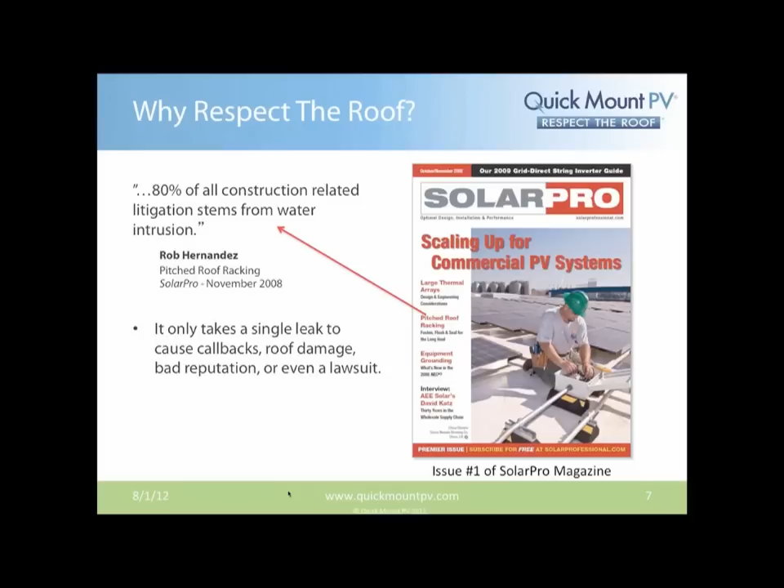For those that haven't experienced a leak in your home, I have experienced two, and one of them was flashing related, not solar flashing, but just flashing. It's really surprising how rapidly the cost to repair these adds up. Drywall damage on ceilings in particular can be problematic if it leaks in the kitchen, and you have to repaint expansive areas of ceiling to match the color. So it's not an insignificant issue, and the cost really racks up quickly.

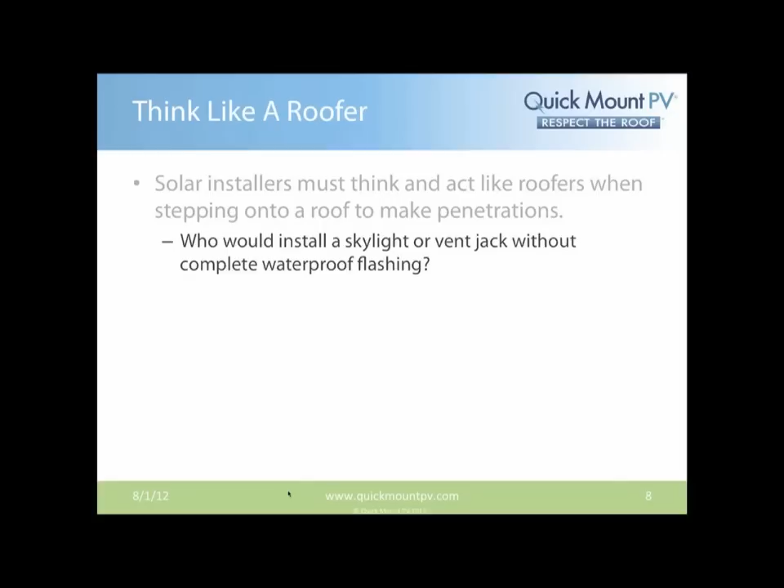So solar installers must think and act like roofers when stepping onto a roof to make any penetrations. Who would install a skylight or vent jack without complete waterproof flashing? And yet today we still see, I wouldn't say most, but a substantial number of installations being installed with absolutely no flashing to waterproof that penetration. So obviously the question is, how would a roofer approach mounting PV or solar thermal to a customer's roof? And in the end, how can we maintain that roof warranty from the roofer?

We'll talk a little bit about what code is for solar mounting systems. This is an image that actually appeared on a major solar publication a couple years back, and it's really surprising to see something like this show up, in large part because there are several fundamental errors with this installation. Number one, and first and foremost, OSHA does require now that everybody who works up 6 feet above the ground, in most cases, would require some form of fall protection, whether it be a fall protection gate or some type of self-arrest fall harness. Failure to use fall protection is a violation of OSHA that they have been actively targeting in the eastern part of the United States. So that's the first problem you see with this.

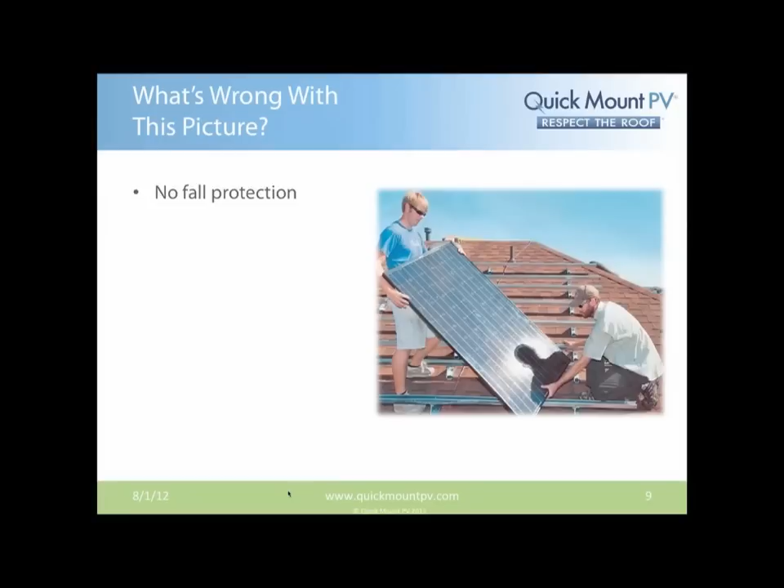Incidentally, the exemption for residential roofers on wearing fall protection for OSHA regulations did expire last year, and now OSHA is again actively pursuing that.

The other interesting problem with this installation, if you look at the mounts, is a special type of bracket with two lag bolts that attach directly to the roof, and the bolts on all the mounts are going right up the same truss. That's a less desirable way to install. Ideally, you'd stagger those mounts every other truss so you don't have to drill as many holes in a single truss. From a structural standpoint, that would be highly desirable.

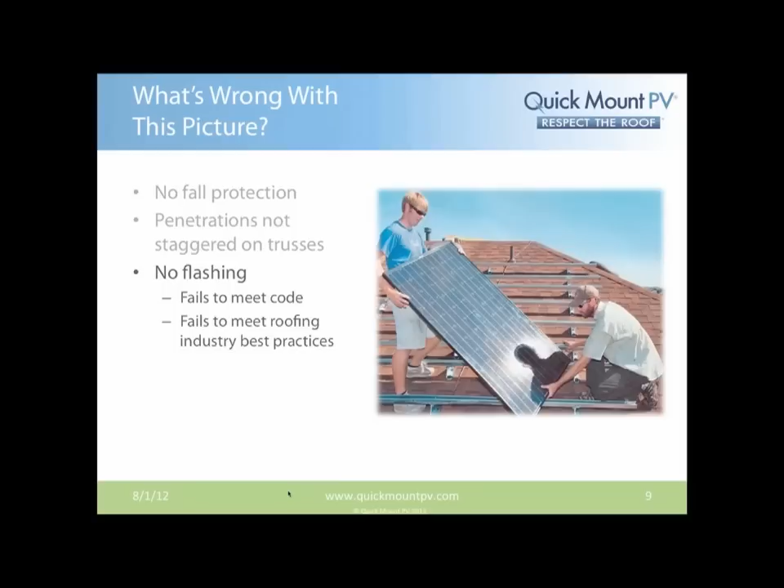Equally concerning is the fact that the feet that are installed have no flashing, no way to effectively waterproof the system other than some sealant in the hole. This not only fails to meet code and best practice, but is a vulnerable liability for your business and also voids your roof warranty. When you do not use flashing, essentially the roof itself is compromised and the roofer will no longer take responsibility for leaks that crop up.

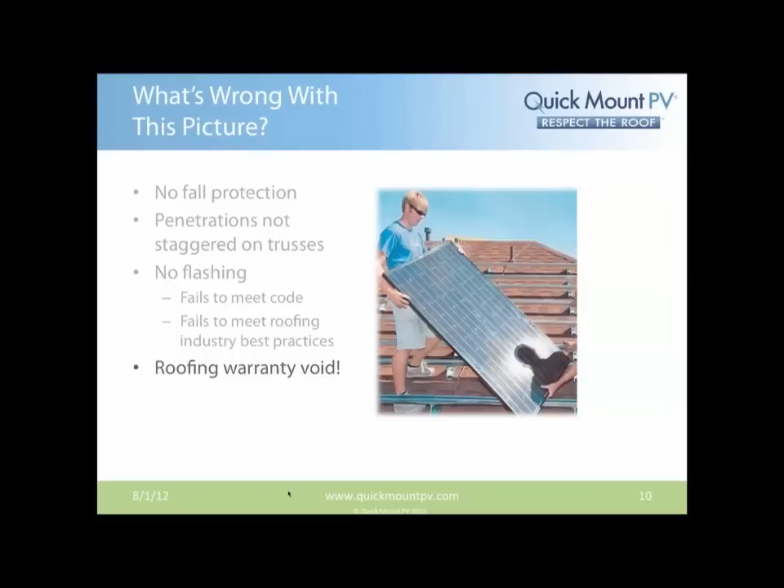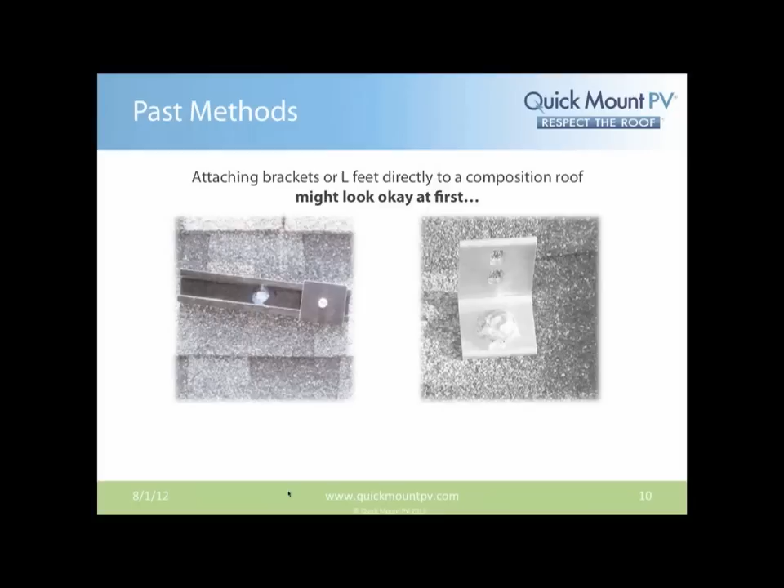In the past, attaching an L bracket or some type of L foot directly to a composition roof might look okay at first, and this is often what we had seen until about 4 or 5 years ago. This was the norm on composition shingle roofs, where you might have on the left-hand side a product known as a tile track, just bolted in the center of the track to the roof with sealant liberally squirted around the head of the bolt, or the L foot on the right-hand side directly to the roof. But these penetrations were dependent entirely on sealant for waterproofing. We've seen that over time, leaks and corrosion are inevitable.

In this example, our owner, Stuart Wentworth, was actually called out to investigate an installation a few years ago. What he found was a comp shingle roof where the tile track product was installed vertically, but there was no flashing, just sealant around the perimeter. And when we removed it, they had a leak in this house. What we noticed were obvious signs of water intrusion, despite a liberal amount of goop used around the perimeter of the tile track.

So it's just not sealant. With heating and cooling cycles, it breaks down, and that seal eventually lets loose. It may not be a major breach, but it might be a small breach right in the vicinity of where a little bit of water can become dammed or pool up, and it can leak in and cause wood rot and extensive damage. So it's unrealistic to depend on sealant for decades of waterproofing service.

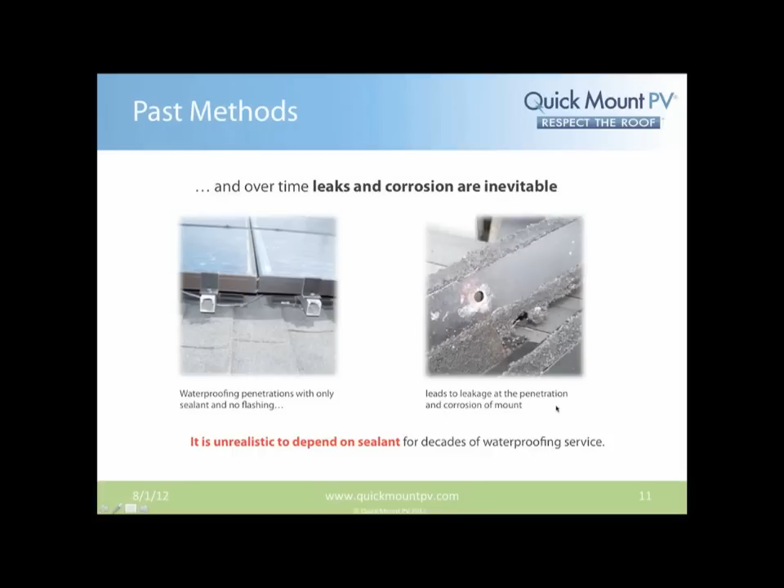Okay, so moving on here. Quick Mount PV products have a full line of flashings for a broad range of steep slope roofs. We're the recognized standard for 100% code compliant watertight mounts that meet or exceed the National Roofing Contractors Association and the Tile Roofing Institute standards and best practices.

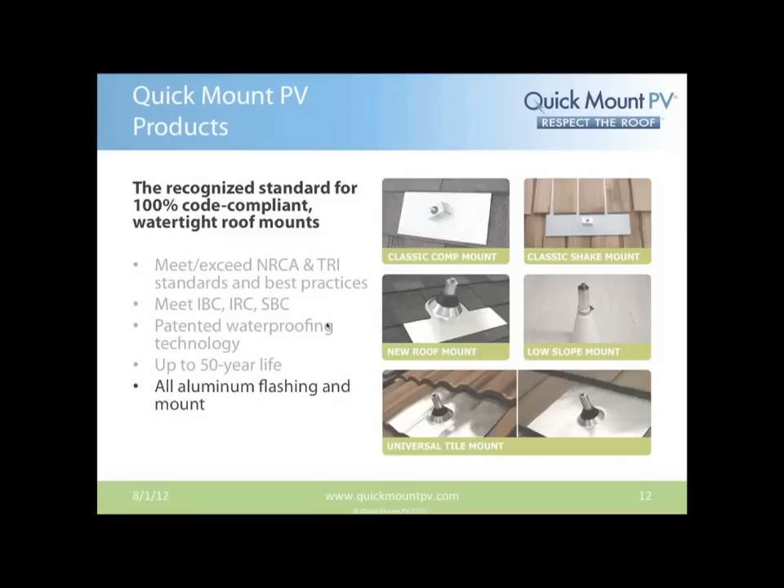Now there's some gray area between what differentiates a standard from best practice from code. But effectively speaking, we've looked at all applicable industry standards, best practices, and codes in designing our products and choosing their features. We meet all applicable building codes like the International Building Code, International Residential Code, and state building codes. We have patented waterproofing technologies, and up to a 50-year life with an all-aluminum flashing and mount and stainless steel hardware.

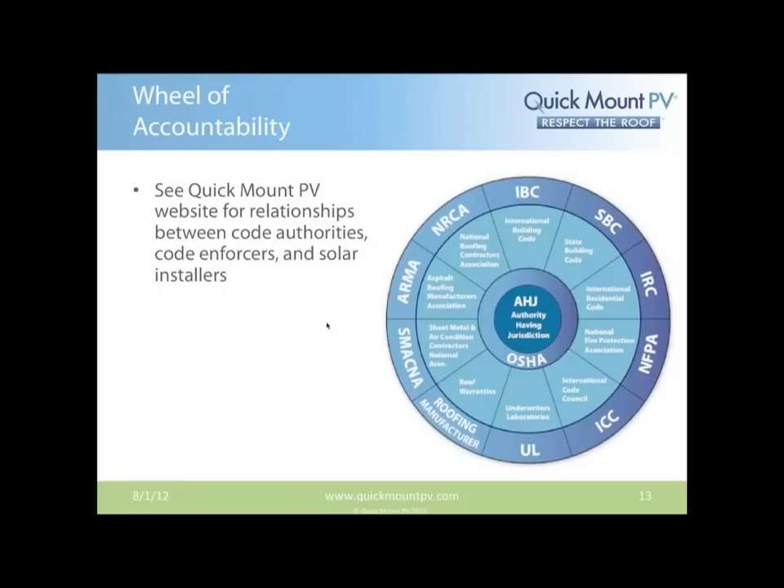The Asphalt Roofing Manufacturers Association applies to any built-up roof or composite shingle type roof. And NRCA, the National Roofing Contractors Association, I saved for last in part because they do significant education on best practices for roofing when solar installations are involved. Jim Kirby, who's done that training for years, is really somebody worthy of listening to when you want to learn more about how roofing is best done to provide the best cost of ownership.

There are a couple of certification programs worthy of mention. NABCEP has an electrical focus - that's the organization I serve as secretary for. My coworker and our director of training, Johan Alfsen, is on the board of the Roofing Integrated Solar Energy certification program, which has a roofing focus and is a branch off from the National Roofing Contractors Association. So those two certifications really speak directly to the concerns of our customers.

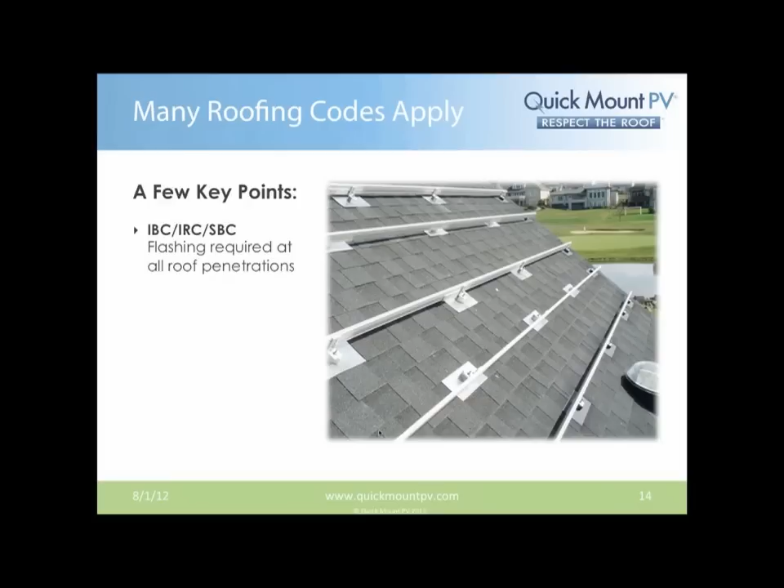A few key points about roofing code. The International Building Code, International Residential Code, and State Building Code all require flashing at all roof penetrations. A PV system puts a lot of stress on a waterproofed penetration because as the temperature increases and decreases, the racking system grows and shrinks. Every day it performs that daily expansion and contraction, and this puts a flexing movement on most, if not all, the penetrations throughout the day and year, and that waterproofing system has to be able to withstand that kind of everyday movement on the penetration.

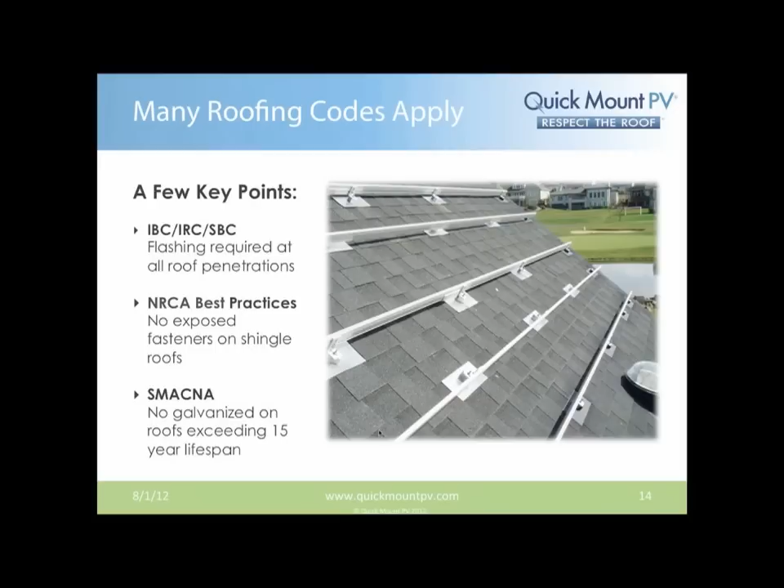The National Roofing Contractors Association states no exposed fasteners on shingle roofs - they don't want any kind of fastener that needs an elastomeric seal around it. They prefer to see something protected by metal. SMACNA, the Sheet Metal and Air Conditioning National Contractors Association, states no galvanized on roofs exceeding a 15-year lifespan. So these are three key elements that must be considered: you need to have flashing, and galvanized is not suitable for more than 15 years.

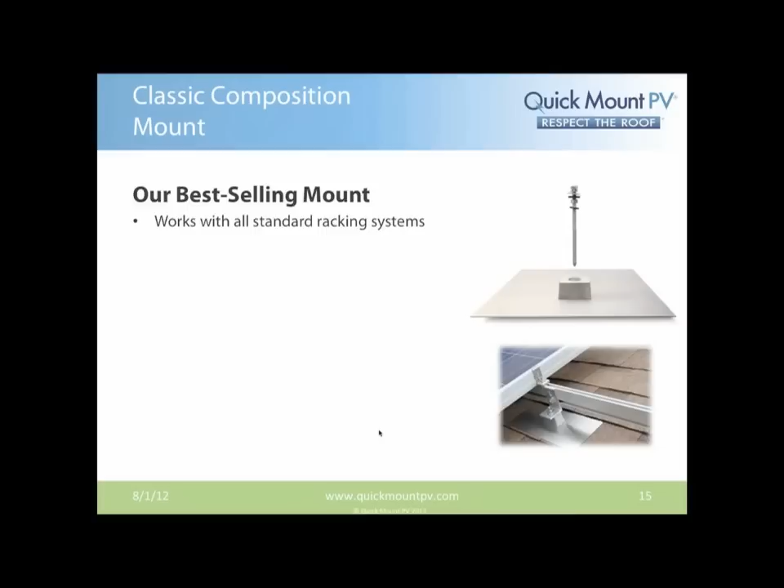Our best selling mount, pictured here, is what we call the classic composition mount. It works with all standard racking systems. The beauty is you'll have available a machined thread with a bolt that you can attach any conventional L-foot to, like the one pictured in the bottom image.

We use a patented waterproofing technology and one-bolt installation that speeds up the process and doesn't require any shingle cutting. This was common practice with many flashings used prior to the development of the classic composition mount, introduced in 2006. It's all aluminum and stainless hardware providing 50-year life, 100% code compliant, meeting or exceeding all roofing codes and NRCA best practices, and approved by many roofing manufacturers that make composition shingles.

It's also certified by the ICC-ES program. We use a special patented waterproofing technology. I've got a cutaway image coming up, but the beauty is we have a reliable 30-year seal that's spaced off the roof by 0.7 inches. We use two EPDM washers to prevent moisture from getting into the cap of the unit that's raised off the roof, and a thick all-aluminum flashing and mount with 50-year life expectancy.

So to see what's going on underneath that Q block, as we call it, here's a cross-sectional view. We press fit a cylindrical flute into the plate, and over the top of that we put the yellow Q block. You'll see the sealing washer sealing it. When you tighten down on the blue nut, it seals across the top of that flute, and then you have the EPDM washer above it with the L foot, nut, and washer that seal the top. So the Q block is this aluminum block.

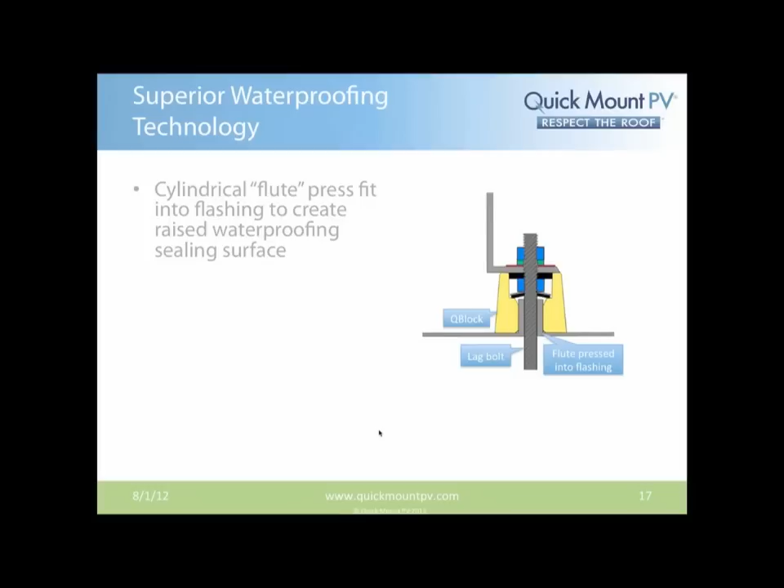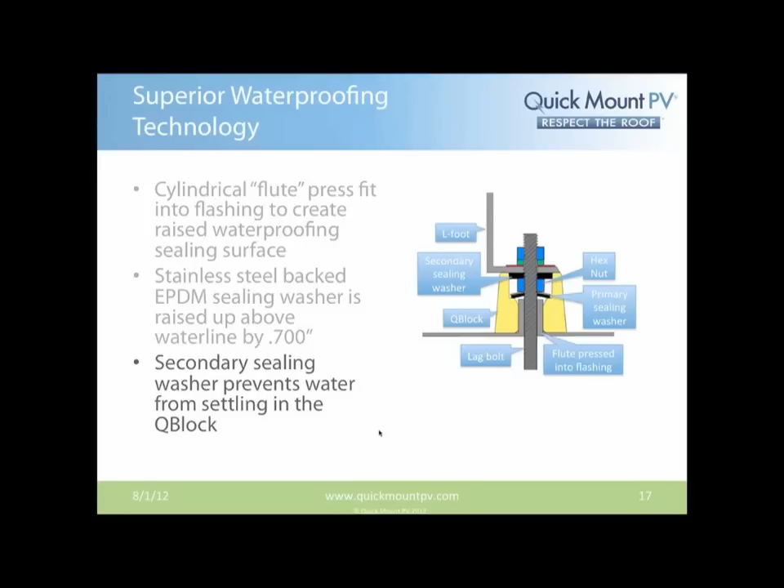We have the lag bolt that goes down into the truss, the L foot, the hex nut, and the primary sealing washer. It's important to understand that your sealing surface is raised 0.7 inches above the surface of the flashing. The secondary sealing washer prevents any water from settling in the Q block.

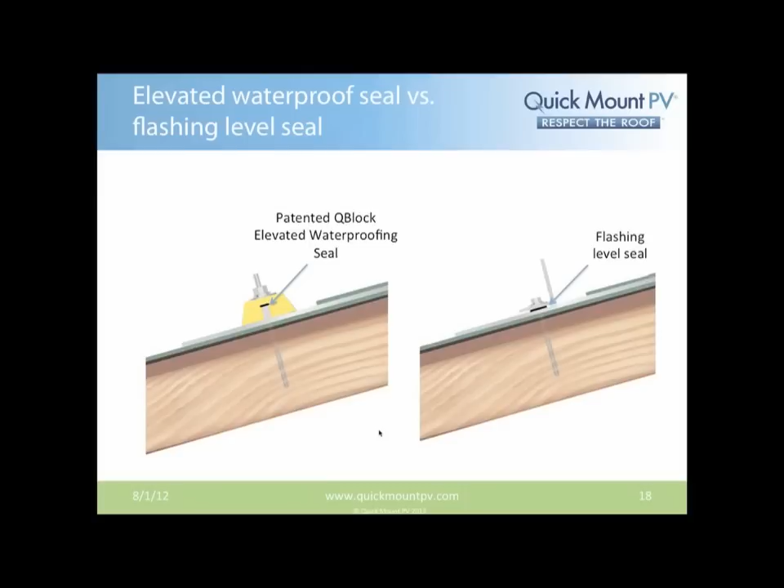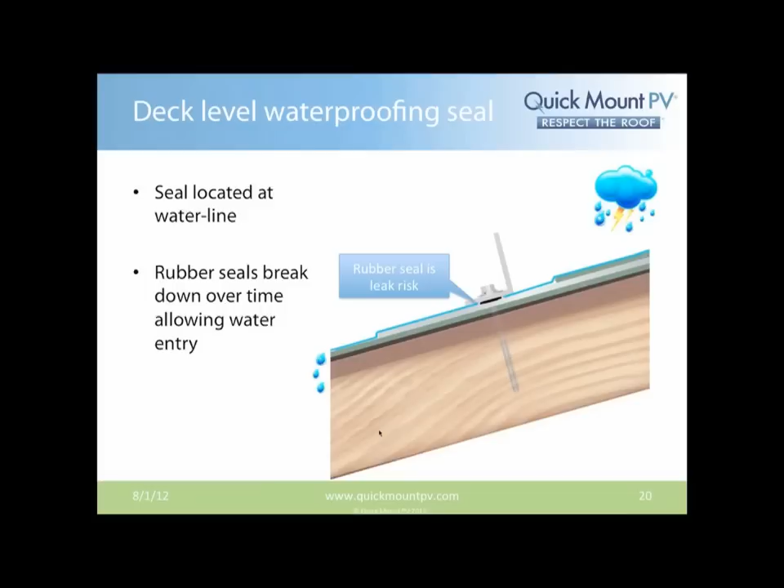What we often see is people using cheaper flashings to save money that use an EPDM washer pressed between the L foot and the flashing. The dilemma is the seal on this design sits right at the water level, so when rain and water run down the roof, the rubber seal deteriorates over time and becomes a leak risk. With our product, the seal is raised off the roof, so that becomes much less of a vulnerability over the long term.

We also make our flashing a bit bigger than code requirements. Code specifies that the flashing extends 4 inches from the edge of the penetration. We actually make our flashing 6 inches wide, which gives us extra room for things like wind-driven rain protection. It's always beneficial to have a bit of extra space on either side, which also gives you the capability of still meeting the 4-inch requirement from the edge of penetration if you drill a bad hole.

A common problem some solar installers experience is that even if you measure your penetrations exactly 24 inches on center, a common rafter spacing, sometimes the trusses are warped, and where the truss should be if it were straight, you instead hit dead air. When that happens, you have to figure out how far you are from the truss. A common process some roofers use is to take a piece of wire coat hanger bent into an L shape, insert it into the hole, and rotate it until you find the edge of the truss, then re-drill your hole.

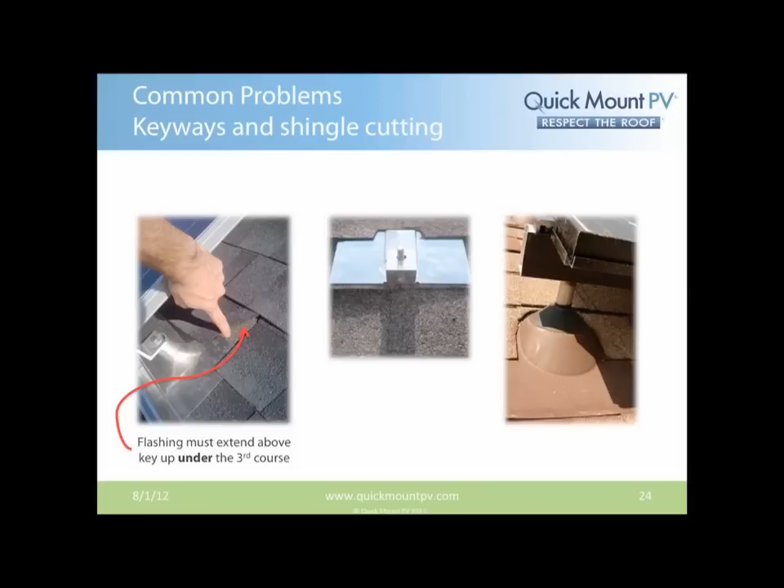Another problem we've historically seen is that flashings don't extend above what we call the third course. Notice in the lower left hand corner, if you lift where there's a keyway and that flashing doesn't extend up under the drip edge of the shingle above where that keyway is, you're not considered to be properly flashed. In the example on the left, the only way they would have been able to accommodate that is to move the penetration further up on the roof and cut the shingle around the hump in the flashing so the top of the flashing could get above the third course. Since that wasn't done, that was considered an incorrect installation.

Most flashings of the design you see do require that the shingles be cut, and this tends to be done with razor knives and tends to be somewhat of a time-consuming process to do accurately and cleanly, and sometimes we see problems result.

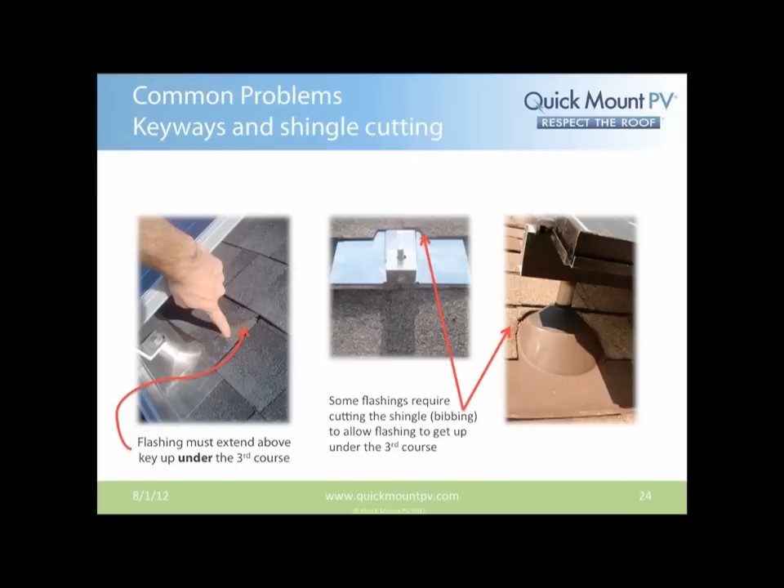So a couple problems. If you are installing flashings thinner than ours, it's possible, especially on a warmer day, whenever your roof temps - not the ambient temp, the actual temperature of the roof surface itself - is over 85 degrees Fahrenheit, this can cause the shingles to soften and thin flashings can deflect when torqued down.

Before I mention this particular test, I want to underscore the fact that shingle temperatures can be up to 60 degrees hotter than ambient temperatures on warm days. On cool days, they can still be 30 to 40 degrees hotter than the ambient temperature. And if it's over 85 degrees shingle temp, the asphalt starts to soften and becomes potentially able to be compressed easier.

So the test that we did here was on an 80-degree day, and our director of training installed our product, using an impact gun as the standard practice in the industry. He torqued our flashing on the upper surface there until the QBlock, the block itself, stopped rotating, which means you've got everything in proper tension.

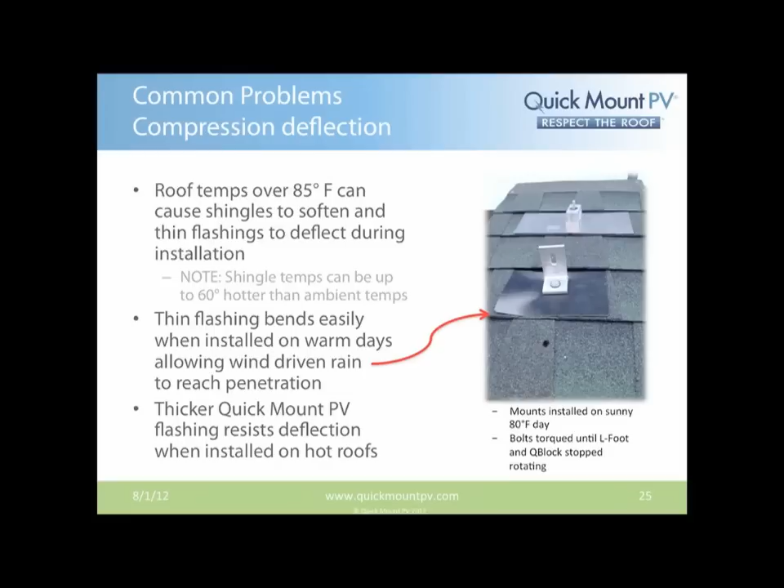He then performed the same installation where he torqued the fastener on the flashing below with the L foot until the L foot stopped rotating. When that happened, it was a warm day again, that sucked the asphalt down under the L foot and caused the flashing to deflect up on the side, which makes the flashing vulnerable to wind-driven rain. The penetration now becomes vulnerable to wind-driven rain. You can see that the deflection extends almost to the point where the L foot is meeting the flashing, and that would be a worrisome situation when you've got rainy, windy days.

Problems we've seen with flashings that rely purely on an EPDM boot is that these boots can suffer from many problems. In the upper left corner, inverted boot is common when that flashing is installed on the post and sometimes pushed a little too far. Unfortunately, the only practical way to fix that would be to use something kind of sharp around the edge and pull the flashing back up, but that sets up a site for a crack to start and propagate.

Shingle cutting problems are pictured in the upper right, where if you aren't careful when cutting the shingles, you can raise them up, making them vulnerable to wind-driven rain and water intrusion, with your shingles peeling up on the side. You really need to make certain when doing the shingle cutting on any cone style flashing that you get a half-inch perimeter from where the shingle is to where the base of that cone is.

The rubber boot losing its grip on the left, and cracked rubber boots - these are things we see, especially in coastal environments, within 1 to 2 years on flashings that require a rubber boot. Now you'll notice that the flashing problems we're showing here are on pipe flashings, and in large part that's because there are many pipe flashings, so it's easier to get a sense of what's happening statistically on pipe flashing.

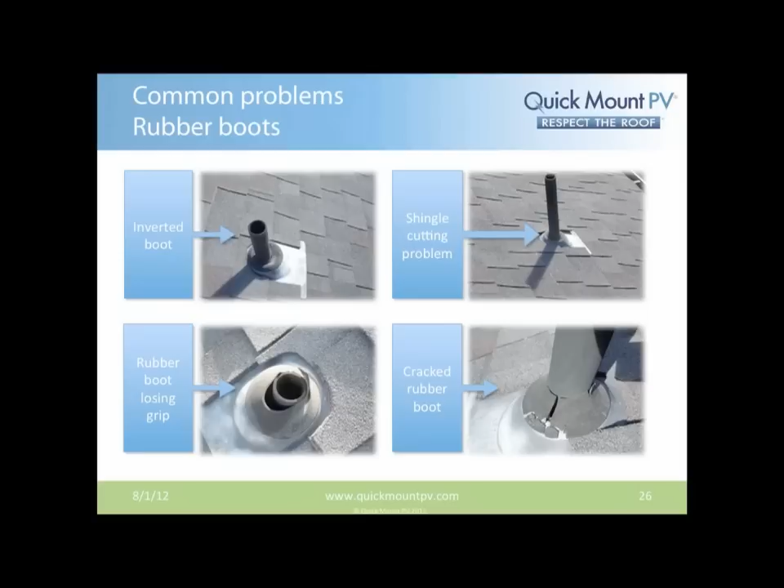The dilemma is that pipe flashings are relatively easy to service and fix. You can just generally pull those out, put a new one in, and away you go. The problem with trying to service a flashing on a PV array is that you have to pull or remove the entire array to access any of the flash points, or at least pull the entire row of modules to access the flashing. So it's very expensive to replace the flashing, and that's why these problems are best avoided.

Okay, so I've got an interesting little issue coming up here. No shingle cutting required is another nice feature of our product. When installed properly, the block will be about 1/2 to 3/4 of an inch under the drip edge of the second course of shingle, as pictured. And when done in that manner, the upper edge of the flashing gets all the way up under the third course of shingles in standard shingle reveal dimensions.

Bear with me while I take a quick sip of coffee, folks.

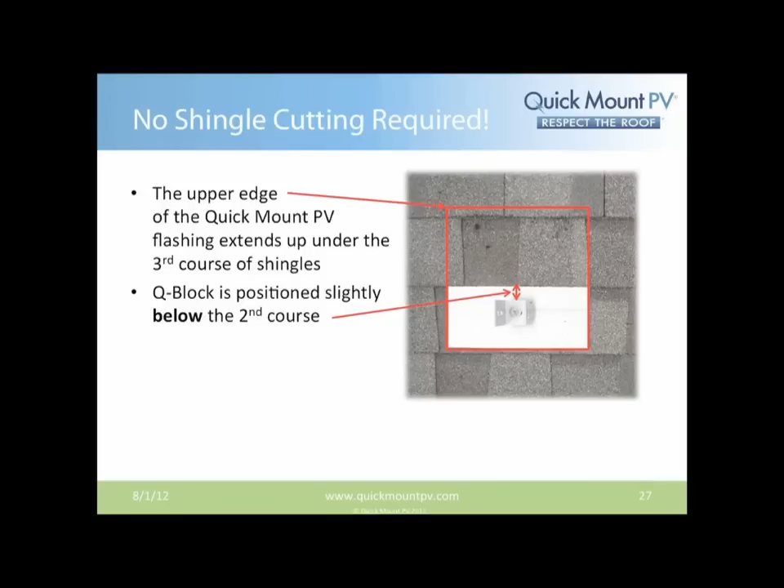So shingle cutting, fortunately, is not required. This would be how the flashing would be installed if you had a cone style flashing, but with the classic comp flashing, there's no need to cut the shingle. It results in a fast, clean, attractive mount, and really, would you expect anything less from a company who decided to name itself Quick Mount PV?

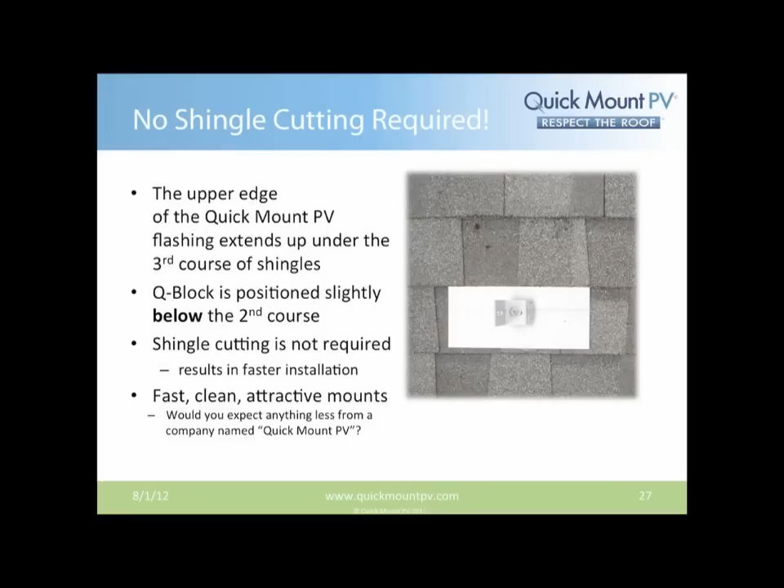So the proper flashing placement, as was underscored by the previous image, just to make sure everybody's comfortable: you want to insert the flashing all the way up so there's about 1/4 to 1/2 inch of space between the drip edge of the first course, or the hole where the hole is located, and the bottom edge of the flashing. When it's done in that manner, you're going to have that flashing up under the third course.

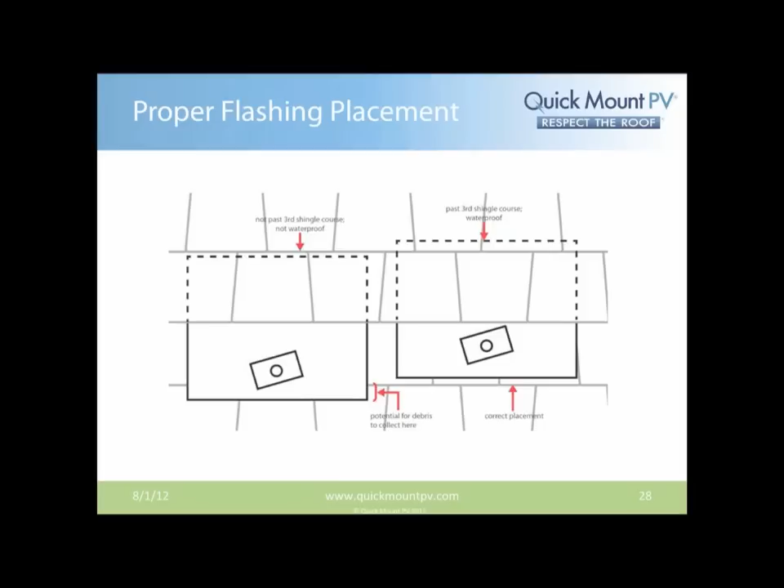So it's very important that the flashing should be up to the drip edge, preferably about 1/4 inch above the drip edge of the first course, in order for it to have the best long-term protecting capability.

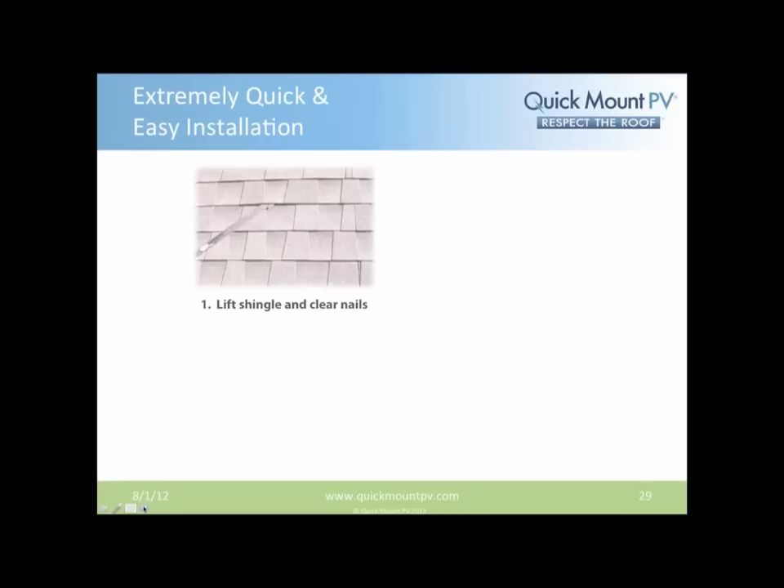Okay, so the installation procedure: what you see there is what's called a roofing bar, sometimes referred to as a shingle ripper, although I'm not a fan of that terminology. What you'll do is slide the roofing bar in between the courses of shingles where you're going to insert the flashing, and you have to find wherever there's a nail and remove it with that shingle ripper. We sell a roofing bar that actually has these little hooks on either side of the head that allow you to pull the nail out. We actually show a video of that on our website.

You then would drill, and this is important, a 7/32 pilot hole for a lag bolt right in the center of your truss. Now, there's a lot of questions about the best manner to find the center of the truss, and I've seen a lot of techniques used, ranging from hammer tapping, which, if you have a single layer of comp shingle on your roof, may be very straightforward to find a truss.

There are those that will get in the attic and measure the truss spacing, a practice I would strongly encourage, and then map that out on the roof. But when doing that, it's important to look for any trusses that may be deflected. Ideally, you're going to locate your 7/32 pilot hole in the center third of a 2x6 or 2x4 truss. You've only got a 1.5 inch wide target, and you need to locate your penetration within that center 1/2 inch of the truss.

So it would be desirable, if possible, when you're on a comp shingle roof, to use something like a scan tool that can actually measure through the comp shingle, through the decking, to the truss below. There are a couple tools that allow you to do that, one being the Bosch D-Tect 150, that's D-TECT, Bosch D-Tect 150 scan tool.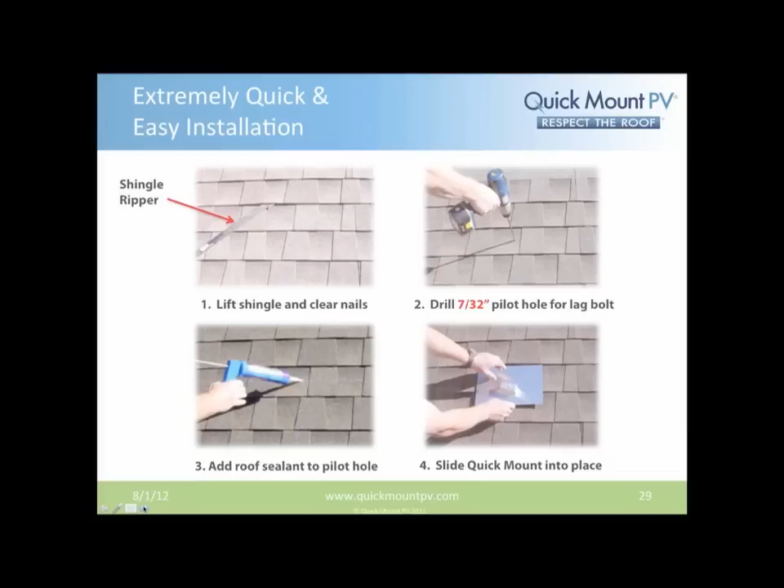Then add sealant to your pilot hole and make sure it's a roofing manufacturer approved sealant so you can preserve your warranty. Slide the quick mount into place. Drive the hanger bolt into the rafter. Now again, I'll say that I show approximately 13 foot-pounds of torque.

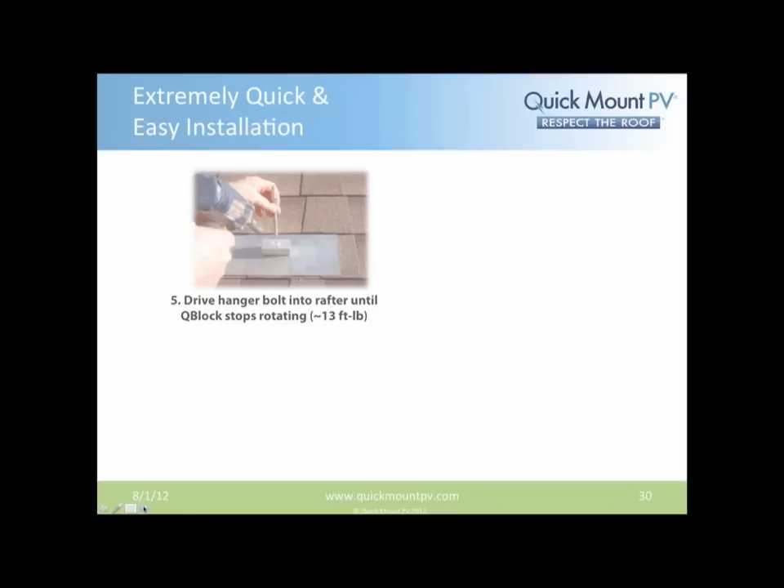On a cold day, that would be sufficient. I'll reiterate, though, that if it's a warm day, you have to be careful. Grab the block while you're inserting the hanger bolt and rotate the block. As soon as it grabs, as soon as this rotation stops, stop torquing down on the bolt, because you've achieved proper insertion of the fastener, and that will avoid the flashing getting potato chipped or deflected up on the sides, as we already discussed. Our product being thicker is more resistant to that, but if you really torque the heck out of it, you can deflect any flashing.

You'll then add your EPDM rubber gasket, attach your rails, and move on to the next row. It looks like we have a couple questions that have come in. Let me take them.

What constitutes, Michael asks, a roof penetration? Do pipe clamps count? All pipe clamp penetrations to be flashed? Well, a penetration, Michael, would be classified as any attachment that goes through the roofing deck itself. Now, one might ask why a nail that attaches a comp shingle doesn't have to be flashed, and the reason is that there's no external forces, functionally speaking, causing that nail to flex over time. With a PV racking system, because it's a metal racking system mounted to a wood roof, its expansion and contraction happens at a different rate than the wood roof and comp shingle below it. So what it does is it flexes the connection point on the mount every day, in and out, expansion, contraction, heating, cooling, and that flexes the waterproofing for years. Sealant is not really considered sufficient to resist that kind of flexing day to day over 30 years, whereas a metal flashing in the style we've designed will indeed perform that waterproofing over the years.

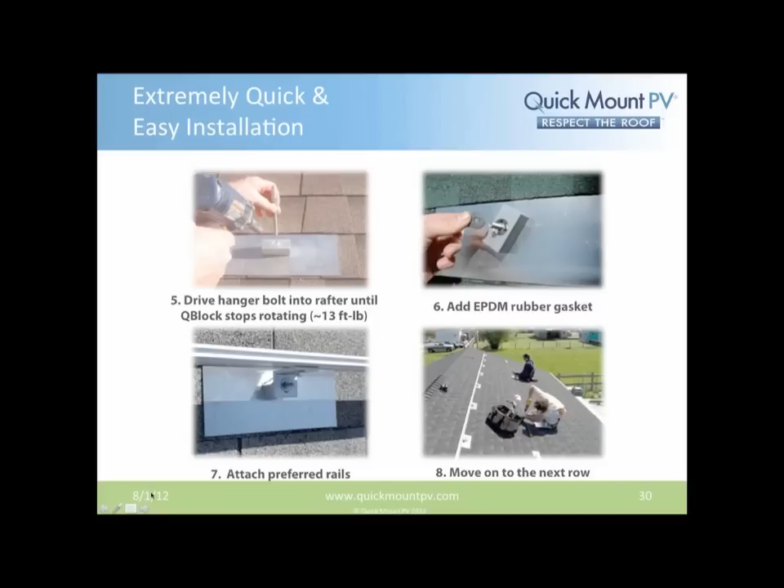Okay, let's continue the discussion. What we really pride ourselves on is a product that's quick to install, but without compromising long-term waterproofing capability. Our strong engineering allows for further spans - in some cases you can span every third rafter and have sufficient strength for your jurisdiction, resulting in fewer penetrations and lower cost.

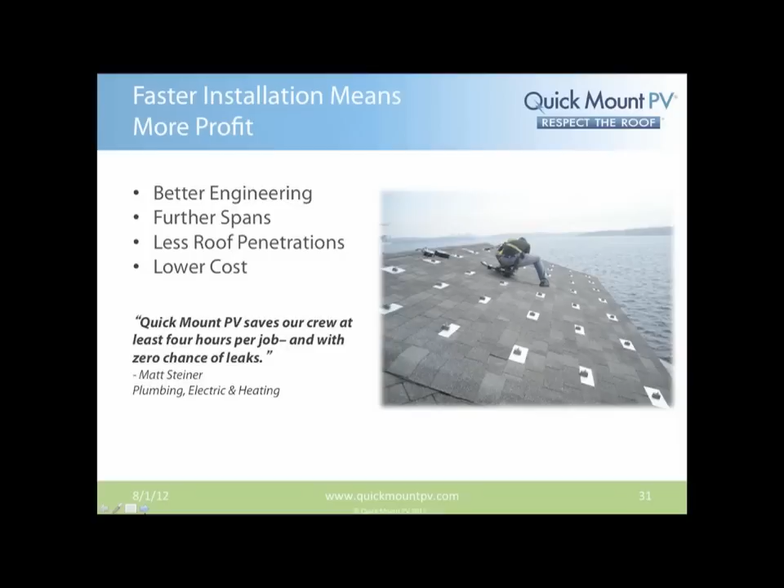This statistic I really like from Matt Steiner, Plumbing, Electric and Heating, says QuickMount PV saves our crew at least 4 hours per job with zero chance of leaks. That's important because an average PV installation tends to range between 2 and 3 days, and if you can save 4 hours on the roof, you've eliminated an additional trip to the job site, which really helps the bottom line profitability of a contractor company.

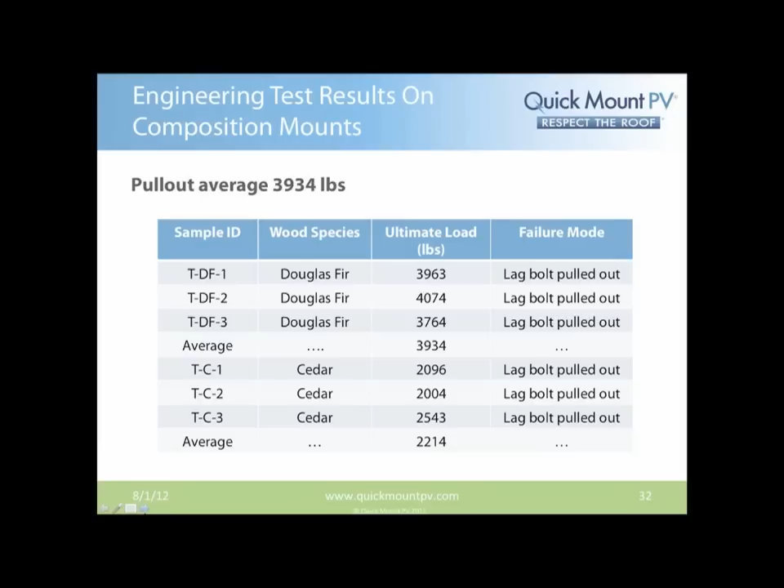We do post all of our engineering test results on our website. You'll notice here with our classic composition mount, we showed the American Wood Council's statistics for pullout of a lag bolt in wood — in this case Doug fir, 3,900 pounds of pullout — and we also show the shear force capacity, or side force capacity, for the classic comp mount in those different types of wood. So you can see it's pretty darn strong both in shear and pullout, making it a solid arrangement.

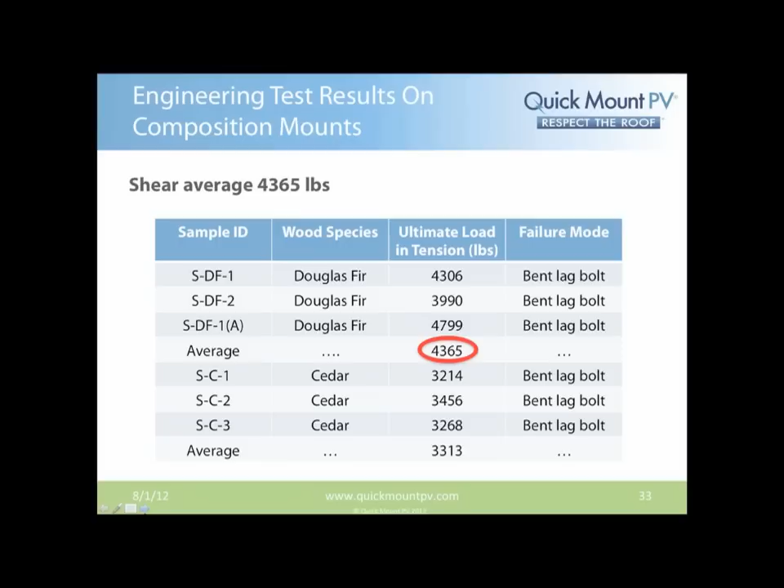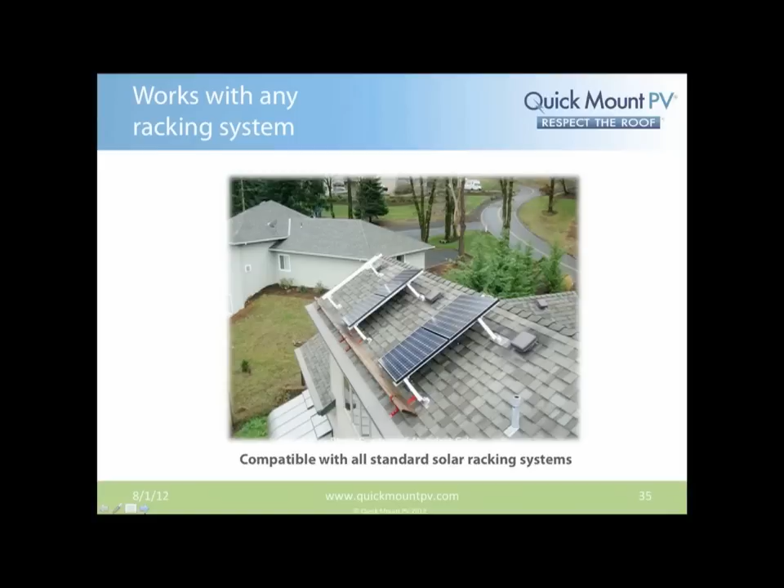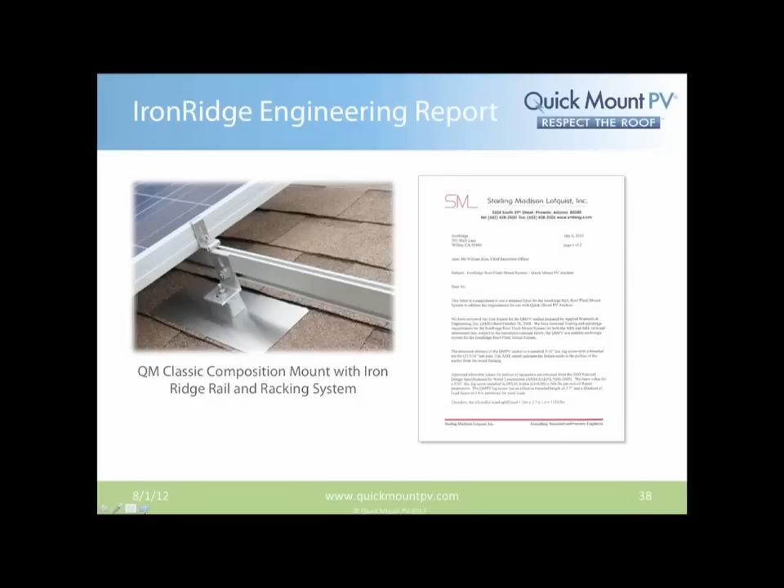Product works with virtually all types of racking configurations. You don't see this practice as much, where you angle the modules off the roof, but if you have a roof where the ridge line is north-south and you want those modules facing a little more south, you might opt for a configuration shown here, and those standoff legs attach just fine to our mounts. We do have engineering reports for standard racking systems like UniRac, Pro Solar, and Iron Ridge. Iron Ridge in particular has a really strong, stiff rail that allows you to achieve greater span distances to reduce the number of penetrations.

Available in 3 finishes. Aluminum mill, the standard aluminum metal color, is the least expensive and most common, but for those in a coastal area or who want longer protection, we offer anodization. You can get clear anodized, which gives you longer life in a coastal environment, or bronze anodized. Don't let the name fool you — bronze anodized is actually a black color, sometimes called black anodized. It not only improves durability, especially in coastal areas like Florida where anodized is required by most inspectors today, but it also improves the appearance.

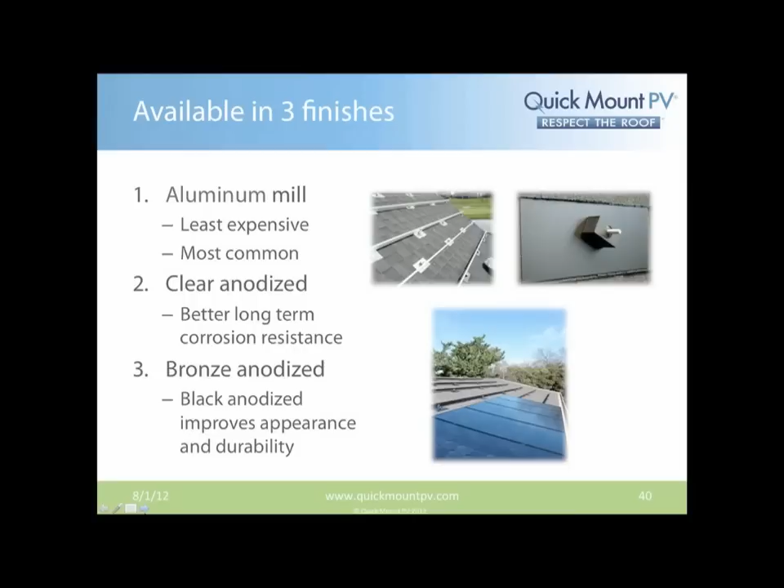What you'll notice is, if you're going to use it just for aesthetic appearance — because you want black modules, black frames, black back sheets, black rails, and now black mounts — you only need to position those mounts on the perimeter of the array. You can use the less expensive aluminum mill flashings on the interior of the array, where they aren't visible once you put the modules over our flashings.

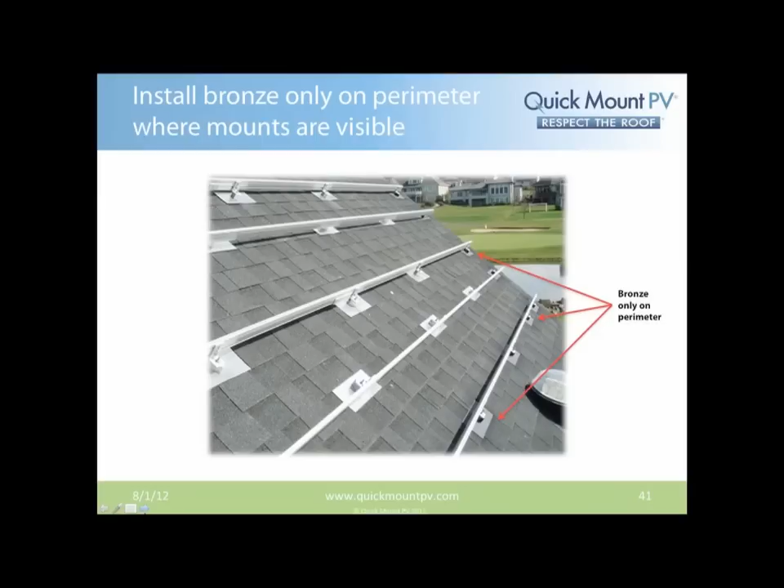Inside each box of mounts, you're going to get 12 mounts. The flashing is 50 thousandths thick, and it's a 12 by 12 dimension. Most other flashings are narrower, at 9 inches wide, which provides the bare minimum of code compliance and no protection for that stray extra hole that might accidentally be drilled.

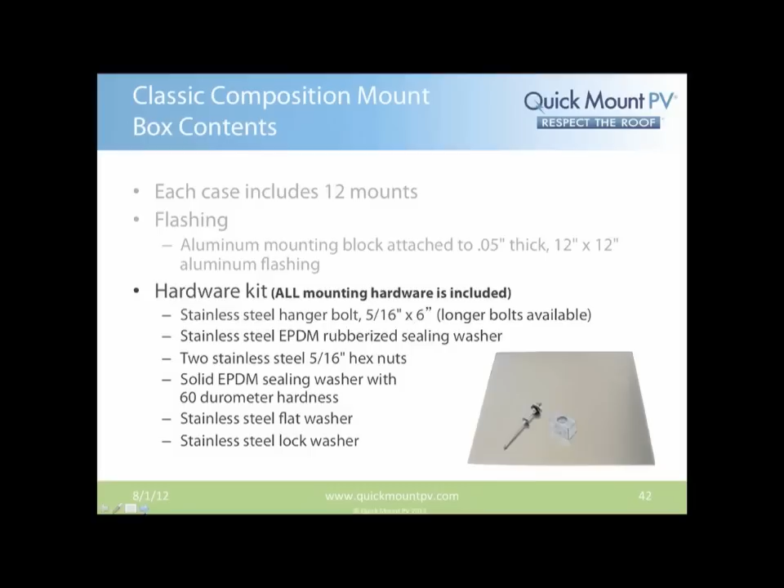The hardware kit that is included has everything you're going to need: the hanger bolts, the washers, the hex nuts. You'll assemble the sealing washer and a single hex nut onto the bolt before you go on the roof, and then you'll assemble the extra sealing washer and nuts and washers at the top to hold your outfit on once you've got the mount installed.

We do have a newer product that we introduced last year called our new roof comp mount. We're going to probably change the name of that pretty soon to the QBase comp mount, because sometimes people are using these as a retrofit too. Oftentimes roofers in particular have an affinity for a cone style flashing. So the classic comp flashing would be really suitable for retrofit, but can be used on new roofs too. I still like that style of product — it really gives a quick, easy installation, which reduces labor costs and prevents you from having to cut the roof.

The new roof comp mount is really for those contractors that have an affinity for a cone style flashing, and in the case of the new roof comp mount, uses our super strong QBase and post. The other benefit of this design is it allows you to use 2 lag bolts per penetration, which is a requirement in some jurisdictions in places with heavy snow loads, like in some counties in Colorado.

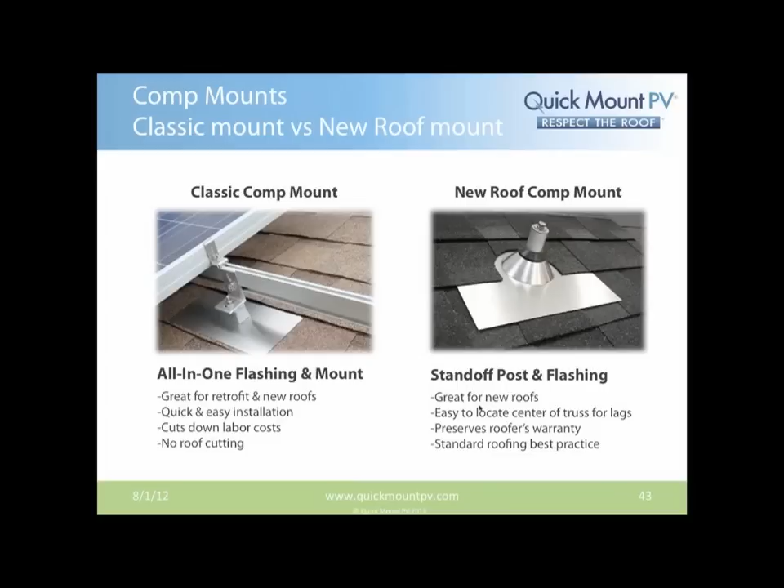The other benefit when using this on a new roof is you can very accurately locate your penetrations right in the center third of the truss to preserve the structural integrity that truss is capable of achieving.

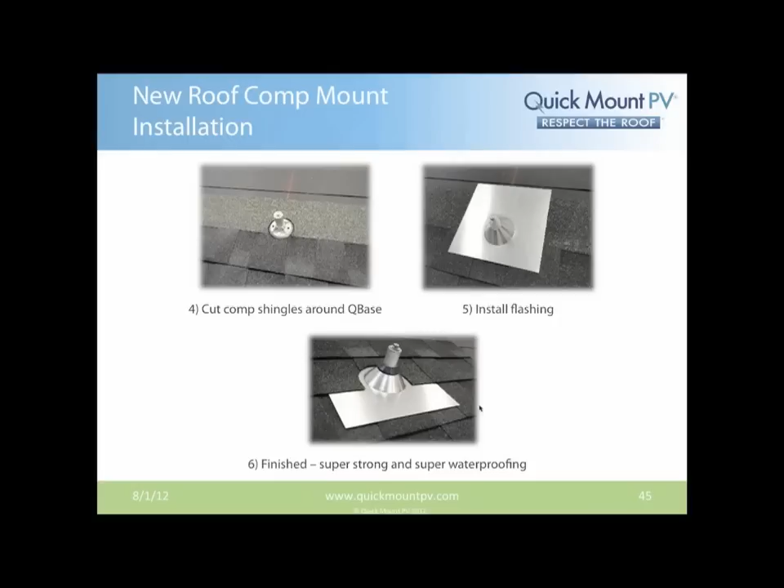So in a new roof comp mount for a new roof installation, what you'll do first is snap your chalk lines where your trusses are and drill all your holes. Secure the QBase to the roof with lag screws, and then screw the standoff into the QBase. You'll then cut the composition shingles around the QBase, install the flashing, and then put the rest of the comp shingles in. When you're done, it really looks nice and super strong, super waterproofing over a 30-year life.

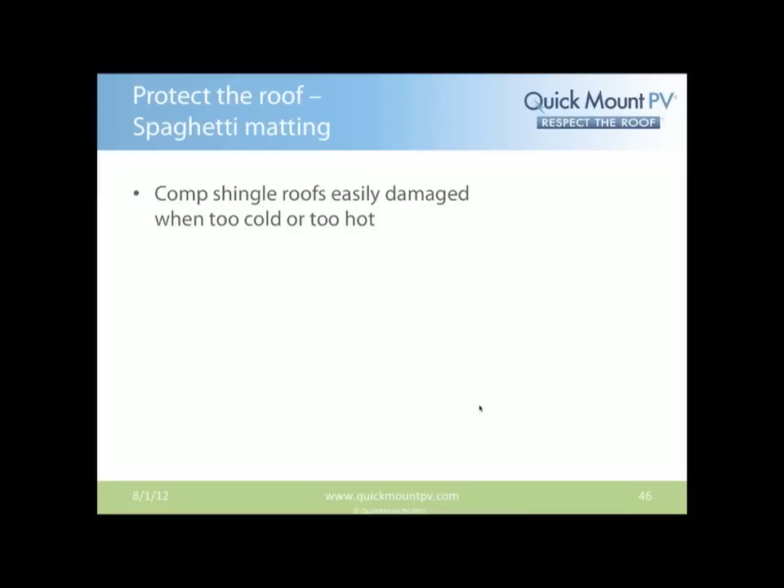One other thing I like to highlight for folks is make them aware that there's some products out there that can make installation a little safer and easier. When you also want to protect your roof surface, if the roof gets under 45 degrees or over 85 degrees, it becomes much more subject to damage. Obviously brittle at the cold temps and very soft at the high temps. And the granules that protect the asphalt over the life of the shingle can easily get knocked off at any temperature, but especially at these high and low temperatures. You'll want to, of course, check your shingle manufacturer warranty to find out what their suitable safe working temperature is.

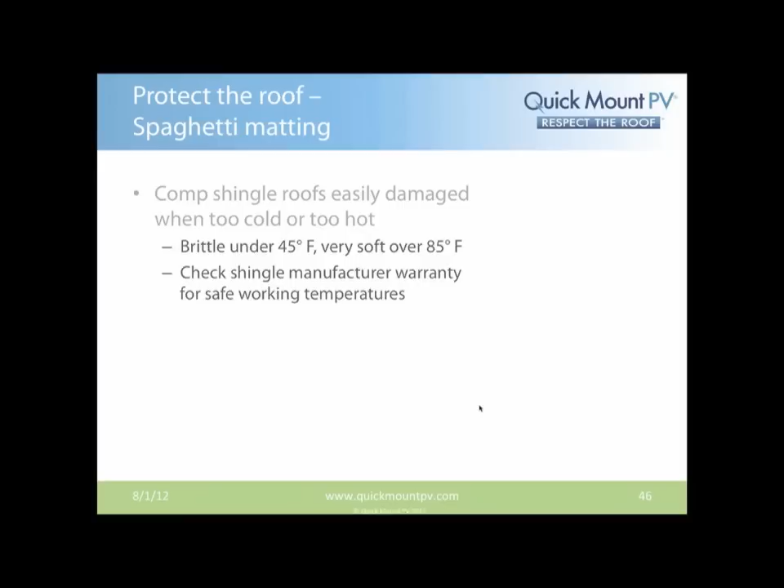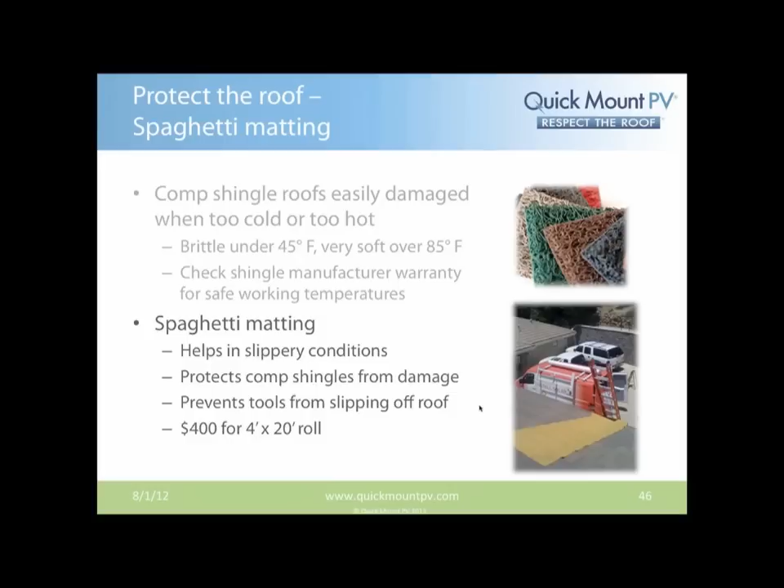And if you're going to be working on a roof outside of that temperature range, a couple approaches that I've seen successfully used. Spaghetti matting is one product that can be used, so that at least you're not getting the abrasion on the roof surface and you're dampening any compression that your feet may do to the roofing material. In the case of tile, it helps in slippery conditions, and it protects the composition shingles from damage, and also becomes a nice grippy mat to put your tools on so they don't slide off a roof, especially if it's a little steeper of a slope. It costs only about $400 for a 4x20 roll.

Cougar paws are another strategy I've seen people that work a lot on comp shingle roofs use, and these are just special boots with soles that can be replaced, and the sole itself is a real soft rubbery foam material that prevents you from tearing up the roof as much when you're walking around on it. You want to also be very careful on any comp shingle roof to not pivot. The goal is to pick your foot up and place it down, not to shuffle, not to pivot. These boots do minimize the damage, so you can just check out their website, cougarpaws.com.

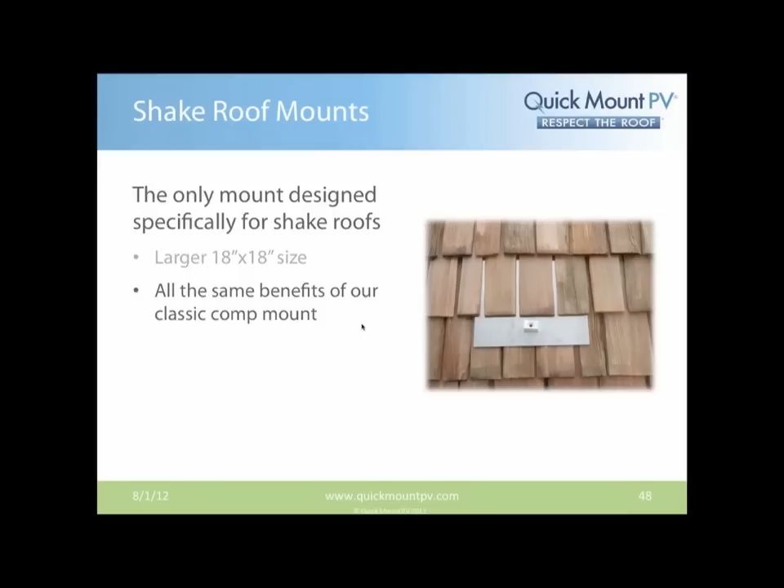Shake is a more challenging roof material to flash in many cases, oftentimes not well suited to retrofittable flashing, but we do have here a flashing that's based on our Q-block concept with that flute that is designed for shake, and it is a larger flashing, 18 by 18 inches in size, has all the same benefits of the classic comp mount, works with the natural waterproofing system of the shake roof.

So in the manner that it's installed here, what you have are interspersed courses of felt paper and shake. What you would do, of course, is you can retrofit this product if you're careful, but you would install the flashing so that the upper edge is underneath the course of felt paper above, and that's the real waterproofing on a shake roof, is that felt paper. So you want to make sure the flashing gets up under the course of felt paper above, and if it's an established roof, trying to slide that flashing up under there may be a bit more challenging.

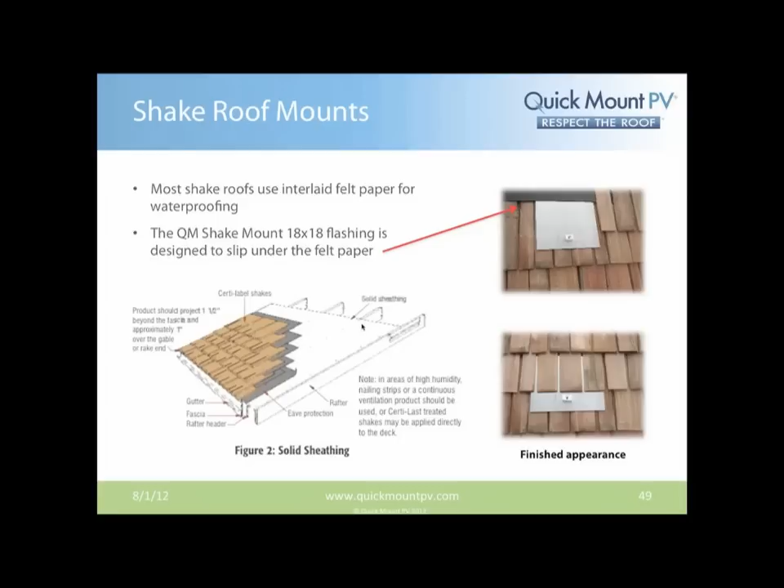The shake roof box contents: 12 flashings and all the hardware you're going to need, and things to consider before installing tile roofs.

Tile is extensively used here in the Phoenix area where I live. More than 90% of solar is on tile roofs, and it takes longer to waterproof a tile roof than a comp shingle roof.

You want to select the best attachment method, whether you are lagging directly into rafters, deck mounting into plywood—a less desirable mounting configuration, sometimes the only option—or blocking between rafters, my personal choice. When you take a 4x4 block of wood and install it crosswise between two rafters, tacking it in place, you use that block as your attachment point. That's a solid attachment point that takes any structural load.

It eliminates the compromising of the structure when you drill a hole into the outer core of a truss, especially if you have a penetration that blows out the side of the truss. That can really weaken a truss. There are some studies being proposed right now by some of the national labs to examine exactly that issue, so something to be very sensitive to.

Inspect the subroof—do you have plywood? If it's been built in the last 20 years, the likelihood is you're going to have oriented strand board, also known as OSB decking material. If it's OSB decking, realize that OSB is not rated to hold fasteners in any significant manner. Plywood, yes. OSB, no.

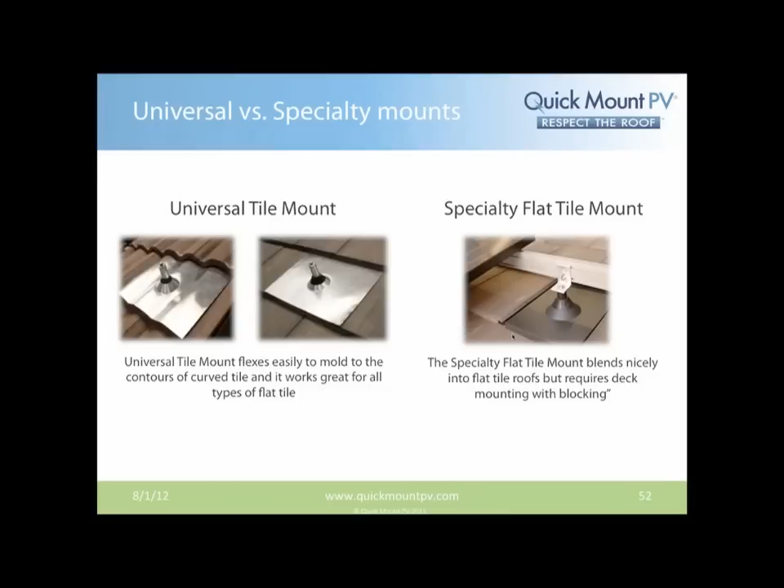The limitation to this technology is it must be installed in most cases with blocking between the rafters, because the location of your penetration is right in the center of a tile, which is unlikely to fall exactly where the truss is. Occasionally you might get lucky and there's a truss under there, but more often than not you're going to be blocking between rafters with a 4x4 to have sufficient material to bite into. In some cases, you can deck mount with a specialty flat tile mount right into the deck, but only with 3/4 inch thick or thicker plywood, and that's not very common out there anymore.

The universal tile mount does meet all roofing codes. It allows you to install with either 3-coursing or felt paper bibbing. Felt paper bibbing is what's shown in the image on top—that's nothing more than a horseshoe-shaped piece of felt paper that surrounds the deck level flashing and is inserted up under the course of felt paper above. In the image shown, you'll notice it was necessary to pry up a batten to slip that felt paper up into the course above.

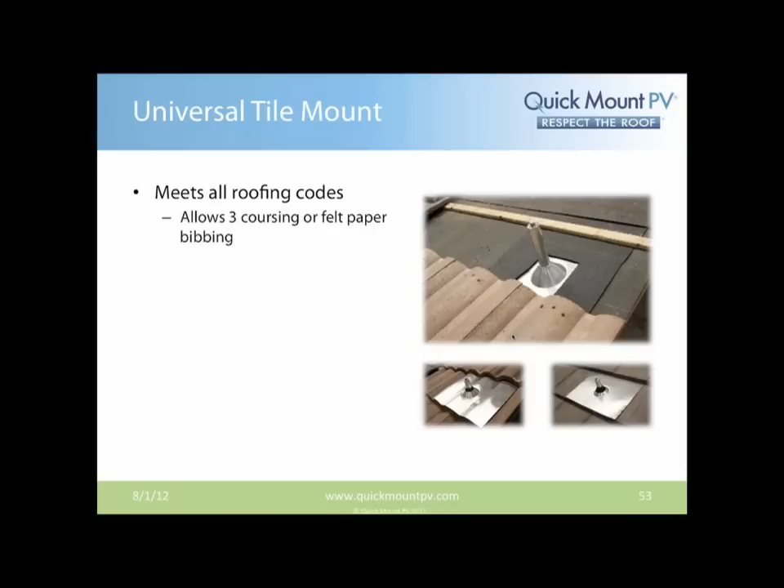This is my preferred method for waterproofing any tile penetration. It's the long-term most reliable way to do it, but you'll note you had to remove several tiles above in order to do the bibbing.

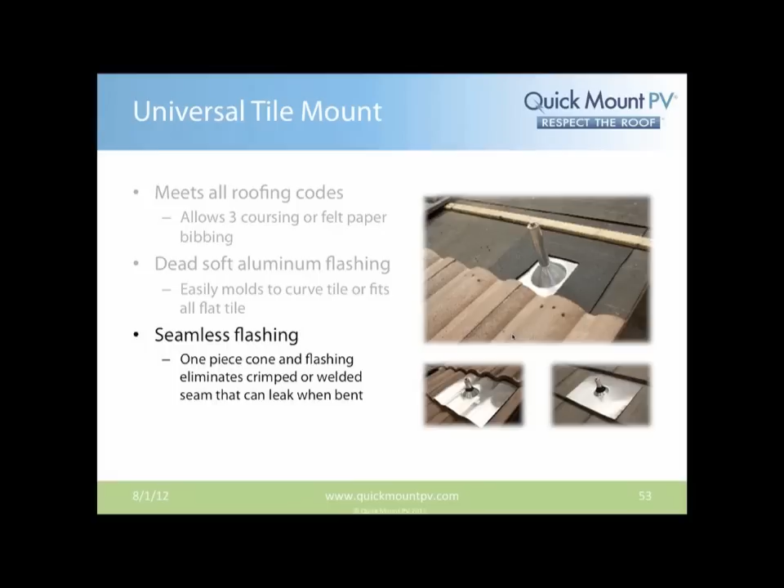This aluminum flashing that we use on top of the tile is dead soft aluminum, so you can mold it to the curves in the tile. It uses a seamless cone that's spun into the flashing, so there's no crimp or welded connection, which is a vulnerable leak point on many flashings in the industry.

Here we're showing felt paper bibbing. In the left-hand image it was necessary to pry up 2 battens, and you had to pull 1, 2, 3, 4, 5 tiles to do this. In most tile roofs that's not a problem. Here in Arizona they nail about 1 in every 10 tiles down, so these tiles just lift out by hand. But it is oftentimes a little less desirable to have to pull as many tiles and pry battens up, though it is the more reliable long-term waterproofing procedure.

The alternative would be 3-coursing, where on the right-hand image you take your flashing, apply a fiberglass mesh around its perimeter, and put down a mastic or roofing tar material to seal it to the felt paper. This can be a reliable solution, just not quite as long-term reliable. Felt paper bibbing definitely takes the prize in terms of long-term waterproof capability on a tile roof.

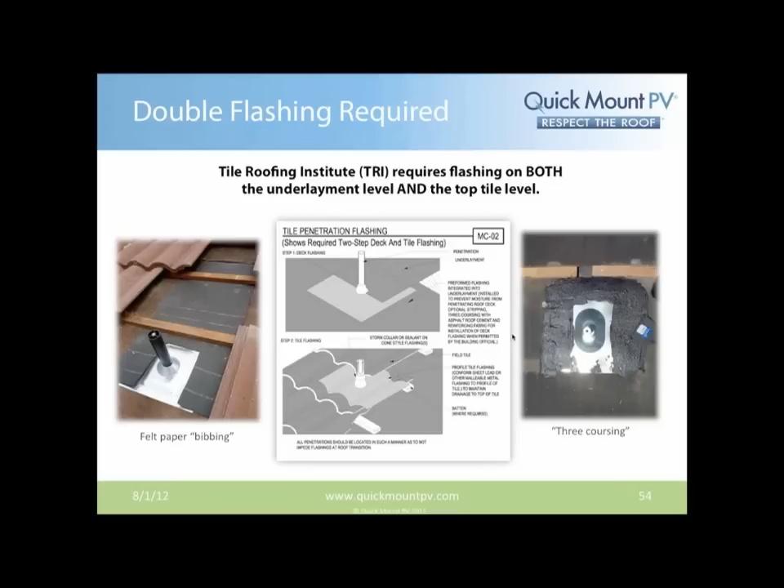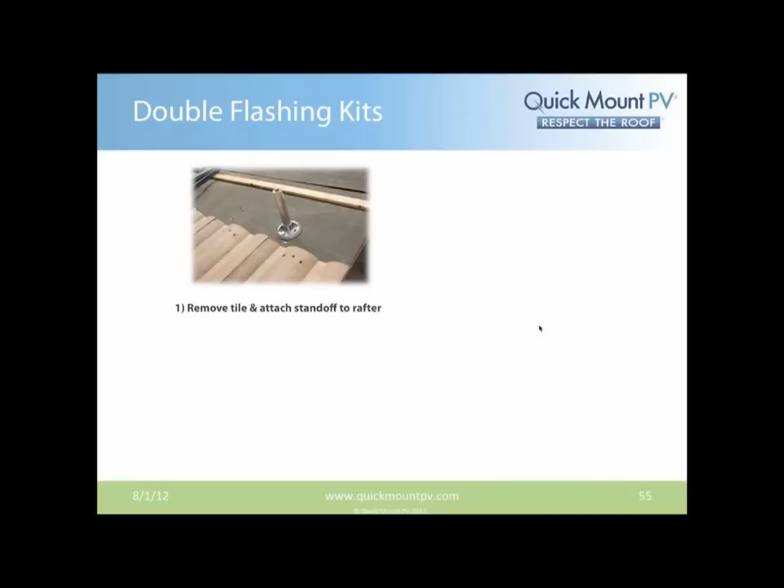The procedure to install it: one of the nice things about tile is you can accurately find your center of truss, which gives a lot of comfort. When you put your lag bolts in centered, you do much less to weaken the truss than if that lag bolt is towards one edge or even blows through the edge of a truss.

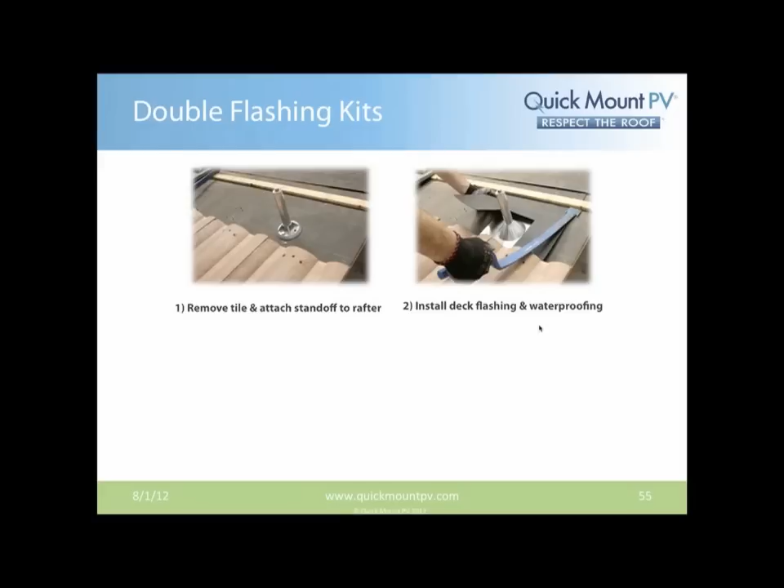You would install your deck flashing and waterproofing, and here we're using our shingle ripper or roofing bar to pry up that batten to get the felt paper underneath it. You might have to pull a nail out of the batten too, but usually you can slide that up under, and then reinstall your tiles.

In this case we showed one of the more unusual variations where the post actually comes at a seam between 2 tiles. What you would do is use an abrasive cutoff saw to cut a square hole out of the tiles, then install the tile level flashing molded to the tiles right there, giving that really nice seamless appearance. That cone doesn't have a crimped connection.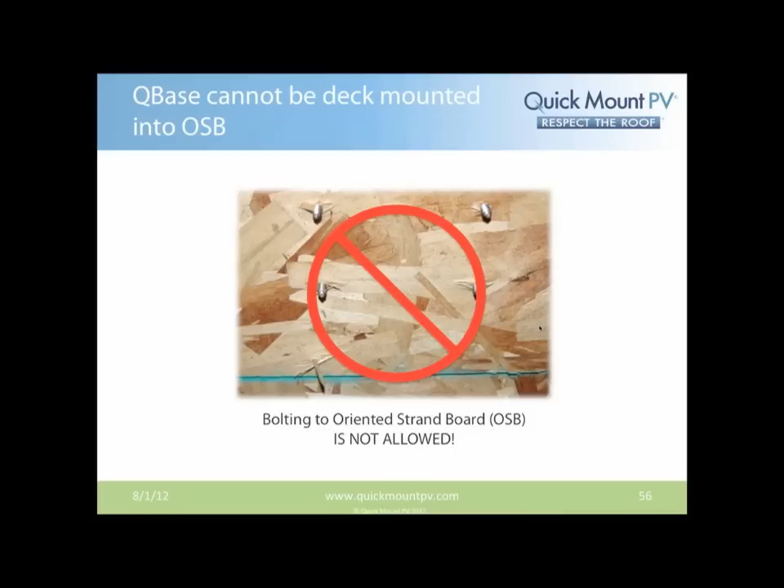Oriented strand board is not allowed. You cannot mount QBase into OSB. If you do so, you essentially have no structural integrity holding those lag bolts in - they can pull right out in a heavy windstorm.

For deck mounting, in this case they're mounting a 2x between the trusses. I would recommend a 4x to get a full 3 inches of lag penetration into the truss. If you're using a 2x, you're only going to get about 1.5 inches thick, and typically pullout ratings are rated by inch, so that might be sufficient if you're mounting 4 fasteners like is done with our specialty flat tile mount in the right-hand image.

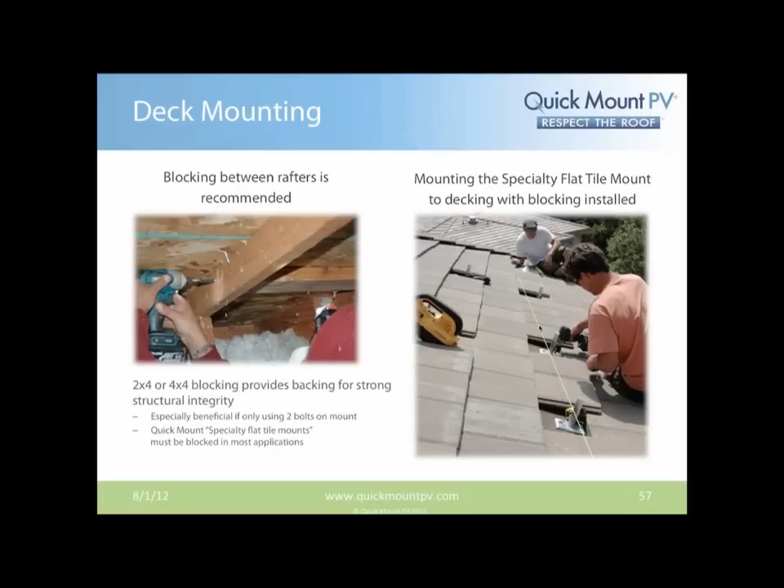So if you have 4 fasteners going into a 2x block, you likely will have sufficient pullout capacity for the local code requirements. If you're using 4x4 blocking with just a QBase with 2 holes in it, that would be sufficient to hold it in place.

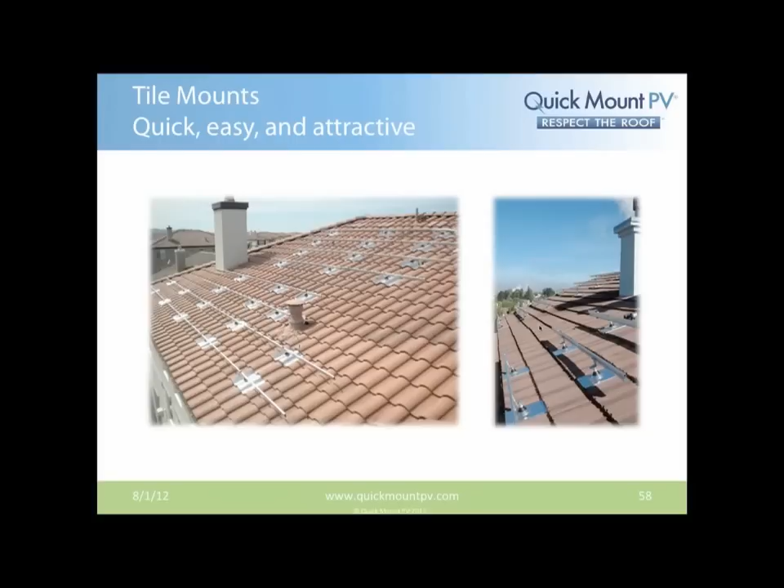Once you're done, on the left-hand side I think this is a really beautiful image of a well-flashed curved tile installation where the flashing is nicely molded and blends nicely with roofs. Some people take the extra step of painting the flashings to match the tile color. You also have the option of using bronze, aluminum, or black color flashings on the perimeter to make it more aesthetically appealing. On the right-hand side you'll see our specialty flat tile mount, a really nice installation that blends seamlessly into flat tiles.

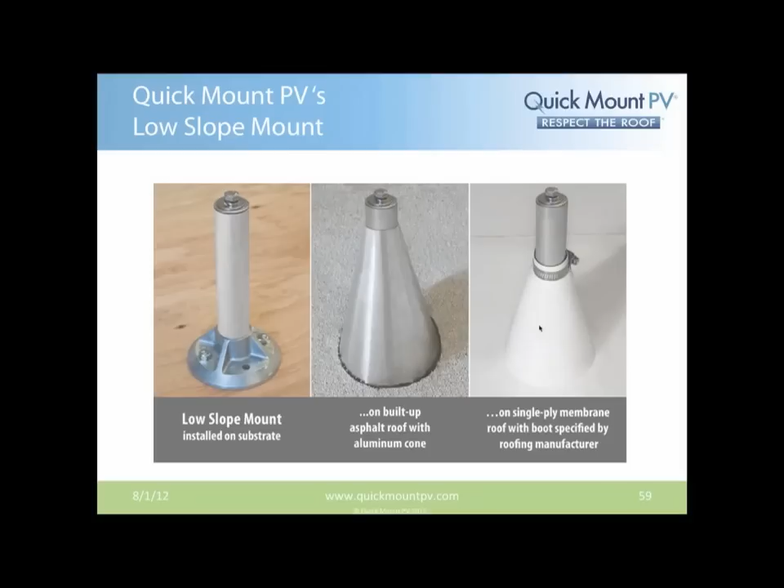We have the product available in several heights. It's a really super robust product that gives a solid, rapidly installed mount that can reduce the penetrations.

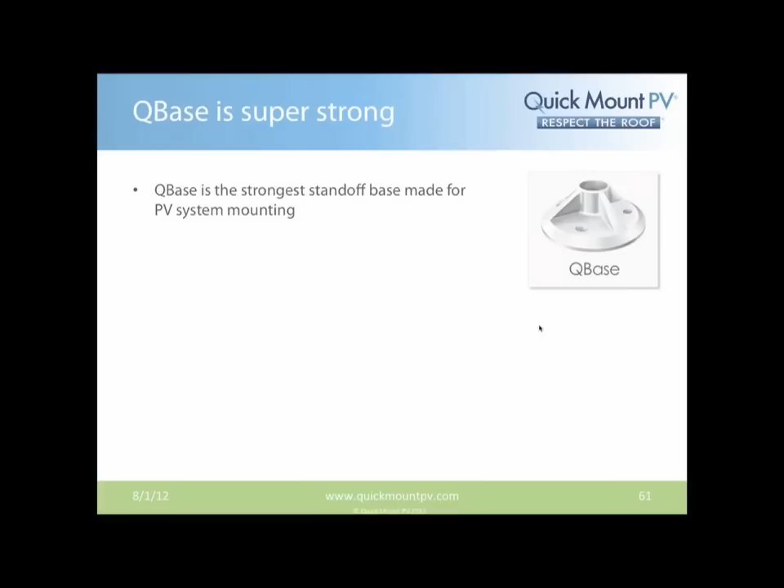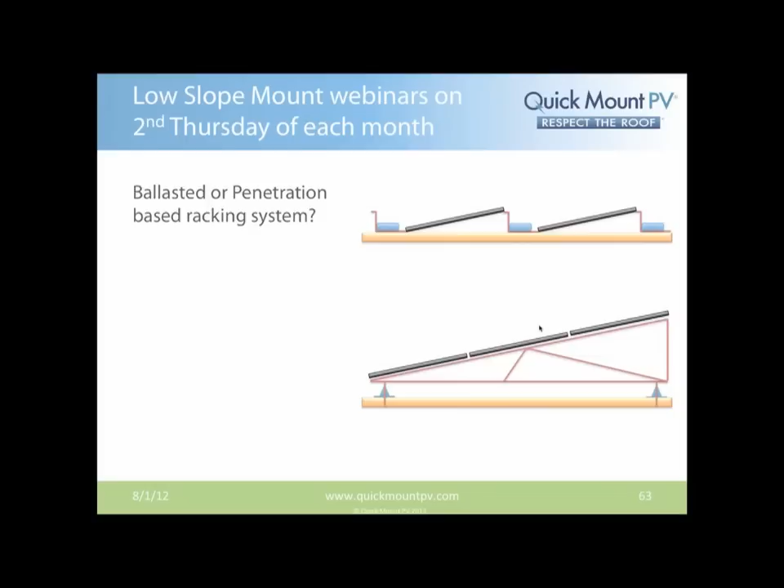I won't belabor the point, because next Thursday I'll be going into an hour-long discussion on this product and how it stacks up with other common types of mounting solutions on the market. We'll talk about penetration-based or ballasted racking systems and the pros and cons of each technology. So for those interested, tune in next Thursday.

We offer a couple other specialty products like our conduit mount. As one might guess, a piece of wood block under the conduit glued to comp shingle would not be considered code compliant, and actually can be a safety hazard in the long term.

Our conduit mounts raise that conduit off the roof to give it some breathing room, so it won't heat up as much, and your PV array's power output won't be diminished by the high temperature of the conduit. It also prevents the conduit from becoming a water and debris dam, which can compromise roofing and waterproofing integrity. It's completely code compliant, waterproof, aluminum, stainless, for either comp or wood shake roofs, and it's a 9x12 flashing. It uses clamp sizes from 1/2 inch through 1.5 inches.

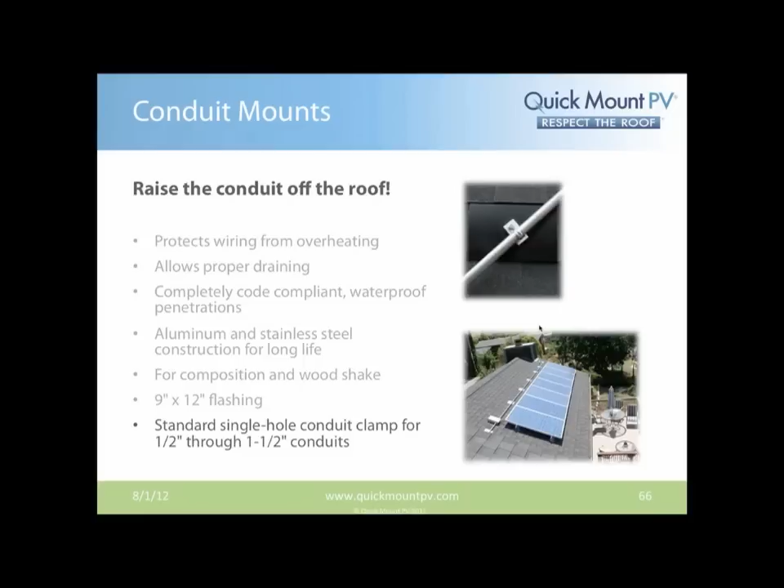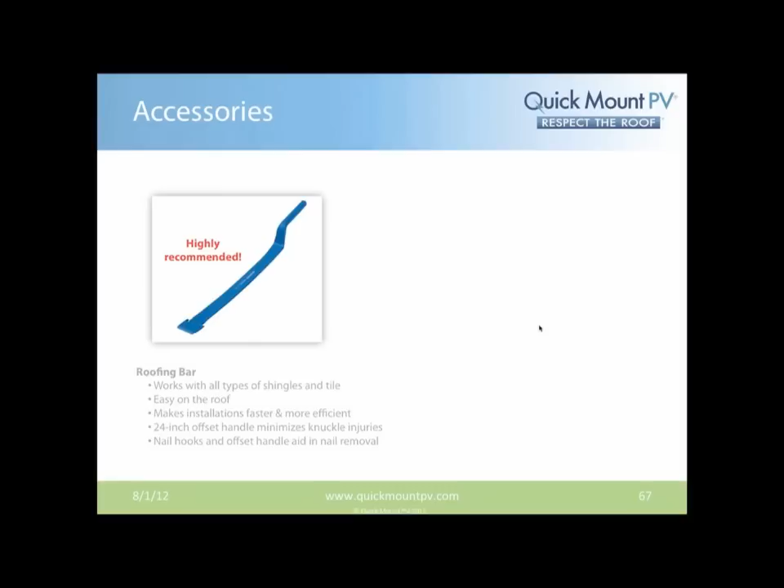We also offer the roofing bar I talked about earlier. This is the most beloved piece of bent metal in a solar installer's arsenal, and it's an often-stolen tool because people absolutely love it enough to steal it. Highly recommend it. Extensions are available for our flashing, so you can thread a 2.5 inch, 3.25 inch, or 4-inch length extension onto our mount.

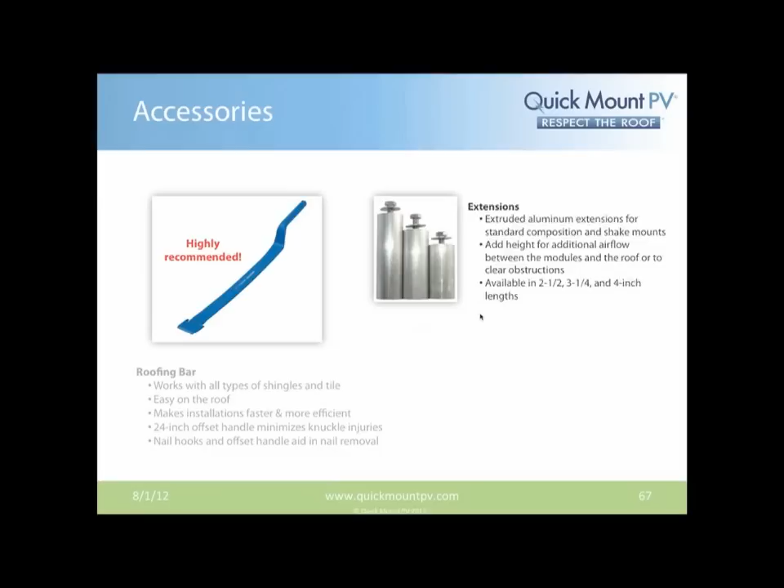And still have sufficient load capacity in most jurisdictions. We do have longer hanger bolts for those people that have to span through insulated roofs.

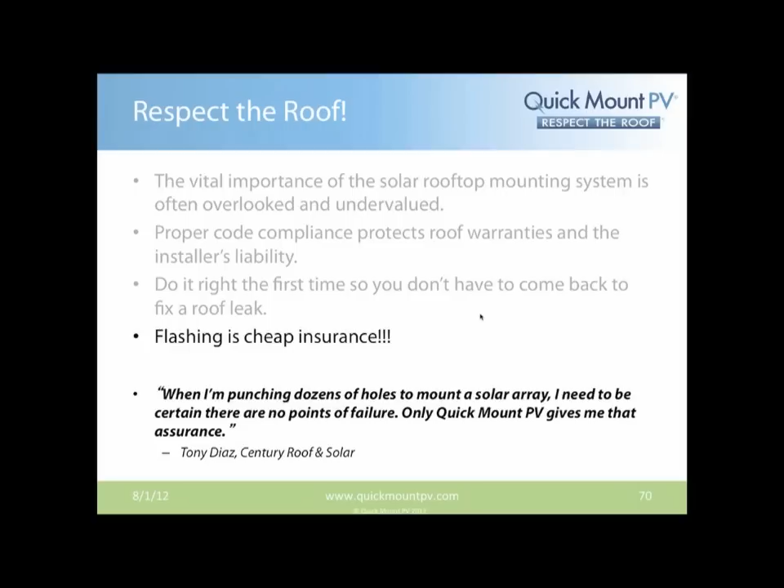People tend to underestimate the importance of waterproofing over the long term. Realize, folks, you're punching dozens of holes in a roof, and it's a statistics game. In the long run, you don't need all of those penetrations to leak - you only need 1 or 2 out of 30 or 40 on a roof to leak to cause problems for your customers and for your liability considerations.